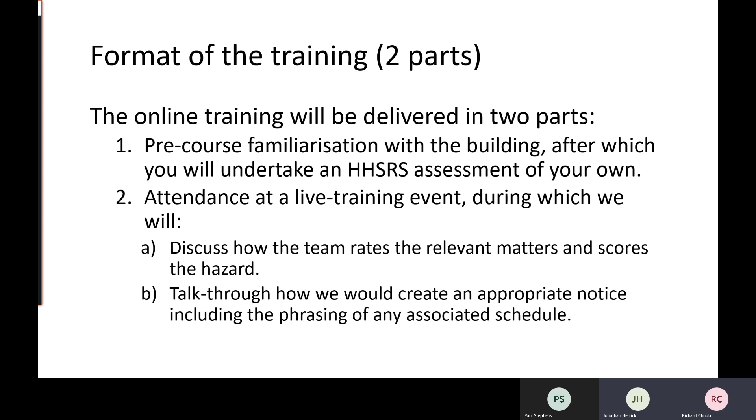The format of the training today: we have an online training course delivered in two parts. The first part is a pre-course familiarisation with the building, after which you will undertake an HHSRS assessment of your own. The second part will be a live online training event during which we will discuss how the team has rated the relevant matters and scored the HHSRS hazard, and talk through how we will create an appropriate notice, including the phrasing of any associated schedule.

The aims of part one, the pre-course familiarisation: this presentation covers an inspection of a hypothetical high-rise residential building. Our commentary aims to explain what we observe and any impact on building safety. You should take note of the presentation and undertake your own HHSRS scoring ahead of the training day.

Remember to score the relevant matters, which are scored 0 to 3, with 0 being not of concern and 3 being of extreme concern. You'll then need to assess the likelihood and also the harm outcomes. It should take between 2 and 4 hours for you to watch this presentation, read the associated documents and make your HHSRS assessment. Whether you work in groups or alone, you'll get more out of the part 2 training if you have engaged fully in part 1.

You will note that we have provided a fire risk assessment and a fire strategy with the join-in documents to go with this video. Some of the information in the strategy is not consistent with what is on the diagrams. This is on purpose and is what you will see in real life, so don't worry if it doesn't exactly match up.

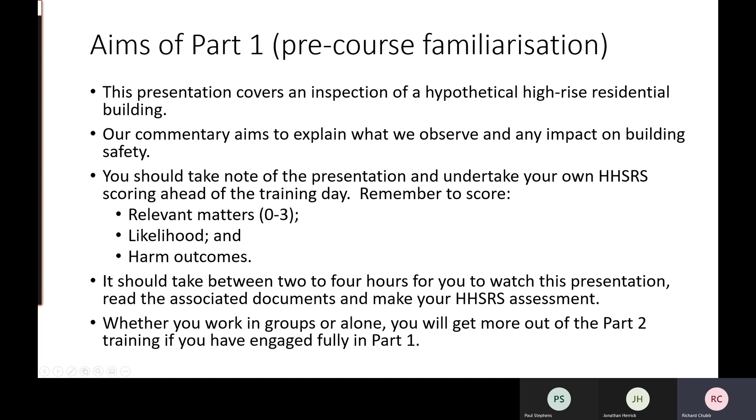Moving on. Part one, the building inspection: what we know before the inspection. Presume that we have served a section 235 notice requiring the production of a lot of different documents.

This first part of the presentation will cover what we have received prior to going on the inspection. Okay, over to John.

We've learned that the building was completed in 2012, and contains 64 flats or studio apartments. The principal construction was steel frame with concrete floors between levels. There's also a concrete stair core shown on this schematic on the left-hand side of the diagram. Floors 1 through to 8 have an identical floor plan layout, shown as a box covering a number of floors marked leaseholder flats. There's a 15-metre travel distance from the furthest flat entrance door to the staircase lobby.

There is a smoke extraction system, shown as the smoke shaft on this diagram, and an AOV, an automatic opening vent, at the head of the staircase. The diagram also shows basement car parking, with the ground floor accommodation occupied by 2 commercial premises and an unstaffed reception area. The front door, the main access into the building, is secured with a key fob access, designed to secure against any unauthorized access. The height from the ground floor to the highest occupied floor is 26 metres, and there is a separate exit from the basement car park to the outside.

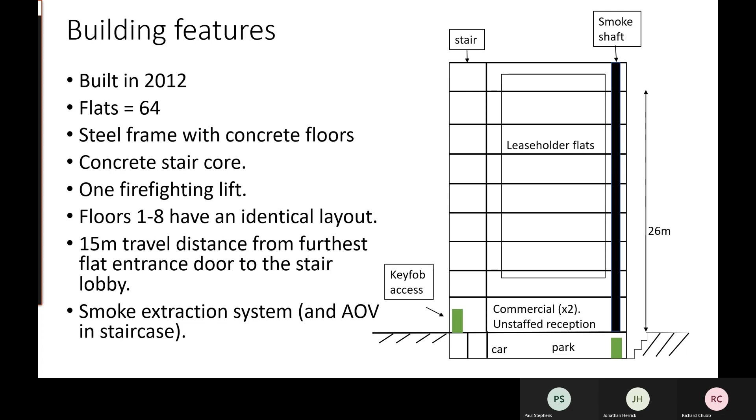Now, this is a typical floor plan layout for floors 1 to 7. The previous slide said that floors 1 to 8 are identical. While that's true, the cladding on the building differs at different floor levels. So on floor 8, you will see that the wall system is different. Let's start with the wall system.

On floors 1 to 7, the predominant wall system is between terracotta, shown as the green lines, which are the end caps to the building, and ACM, which is between the balconies here, coloured grey. The black lines on the building here are balconies that serve each of the flats for outdoor space.

Now, moving on to the floor plan itself, to the left-hand side you can see the staircase enclosure. You can see that the door from the staircase opens towards the staircase, so that's in the direction of travel. If you were escaping a fire in a flat and heading into the staircase, those doors open in the direction of your travel.

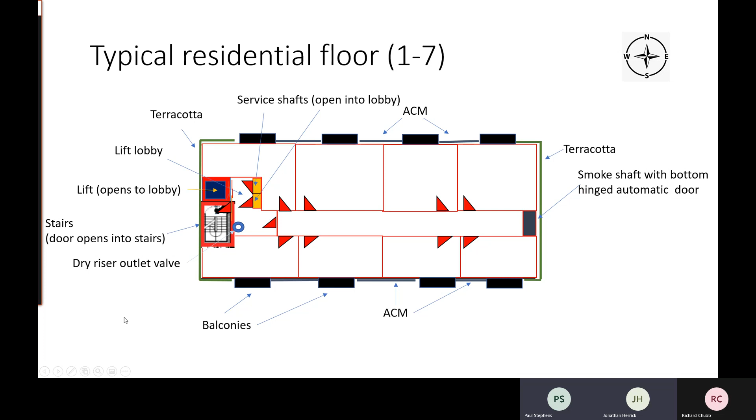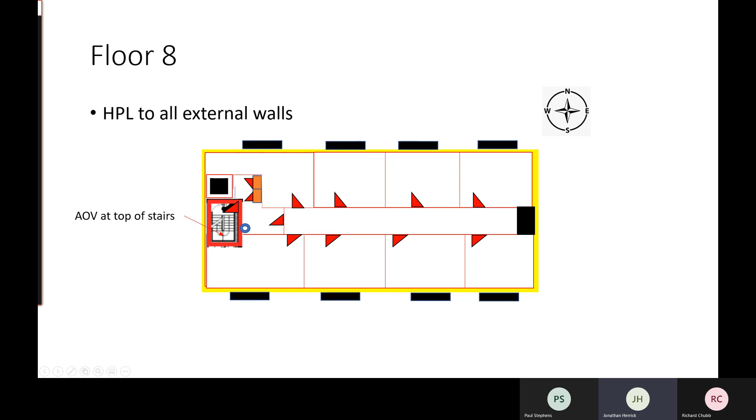So now we look at floor 8, you will see that the actual floor plan layout is just the same as the floors below, but our cladding system has changed on this one. We'd say this is the crown of the building, and it's this yellow colour, which denotes an HPL wall covering, a high pressure laminate wall covering cladding system to the outside of the building on this floor.

So that's dealt with the residential floors on floors 1 through to 8. As we descend now to the ground floor plan, you will see that the ground floor has that fob access control to the front door, and immediately in front is a reception desk with post boxes and a small office for the occasional staff that work in the building.

You can see that it's necessary to walk past the entrance to the staircase in order to get to the lifts that service the building, and that there's no communication at all from that residential access point to the commercial buildings, commercial 1 and commercial 2, as shown on this plan.

The bin store is accessed from the outside through a separate door and does not communicate at all with the inside space. You'll also see a ramp marked there, which is the vehicle ramp, leading down to the basement car parking areas.

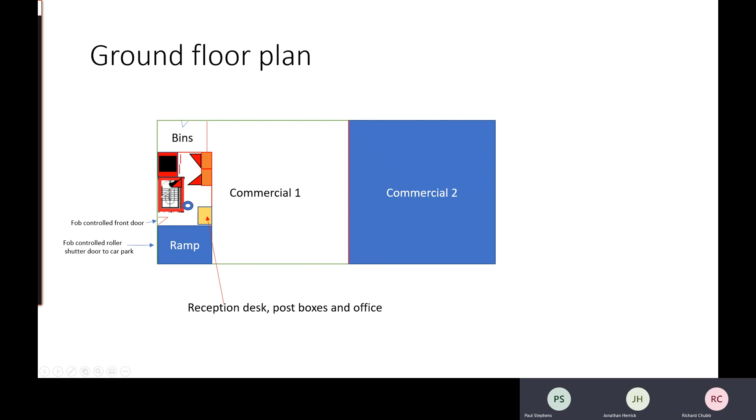So down onto the basement areas, we can see here that as we come out of the staircase enclosure, there is the lift adjacent to it, and there's a door that goes straight through to the car parking and cycle store, which takes up most of the basement area. But there is a small room accessed from the car park, which is the plant room for the building.

At the far end of the basement car park, there's an alternative exit route and another small staircase, which goes to the ground floor and to fresh air.

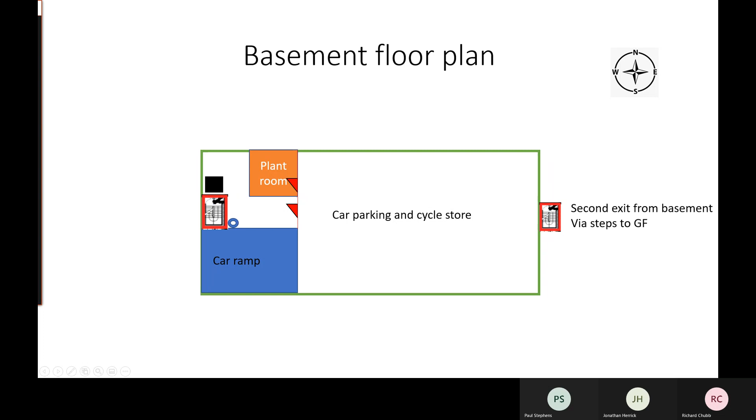Okay, so then we look at what's inside the flats regarding the services to the block and to the flats themselves. We have hot water and heating provided by a gas boiler that serves the radiators to each flat, and the gas pipes actually come through the service riser in the firefighting lobby.

We have gas service risers coming up through that area that then go through the ceiling voids to serve each gas boiler to each flat. There's a gas boiler to the common areas contained in the plant room of the car park. Drinking water is provided via pumps from the central water tank in the basement plant room.

There's electric meters for each flat, contained in cupboards to the protected corridor. There's also a secondary electric supply for use for the lift should power fail, and for the smoke extraction system. This secondary supply can come through via a different transformer, service wire, or it could also be provided via a secondary backup generator in case there's a fire and total power failure to the building, where you need systems to work for life safety.

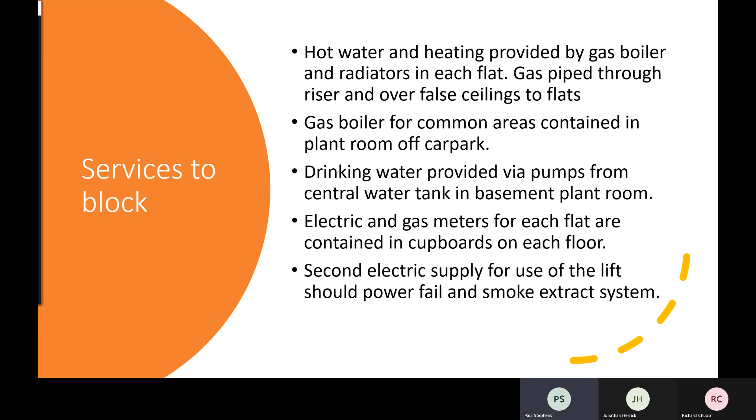Okay, so provided with the joining instructions to the presentation, you should have been provided with a fire strategy document, which was produced at the planning stage and may not be as built. You'll also have been provided with a fire risk assessment, or at least a summary of it, as quite often they're about 60-70 pages long.

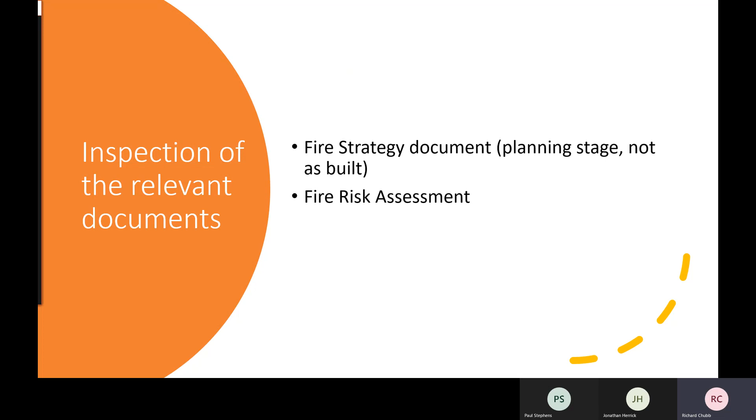Okay, so as you know from the floor plans, you can see what type of cladding is on the building, and we do have phenolic foam insulation. So in this case, we need to look at percentages. We have ACM, which is 20%, and it's category 2. That means the ACM does contain some fire retardant to that product. However, we'll talk about a bit later on how that works with the insulation behind.

We have 20% HPL, which is Class D, Euro Class D. We'll talk about the classification system in a little bit further. There's no valid BR135 report for the wall system. We have 40% terracotta rain screen with a BR135 pass for the wall system.

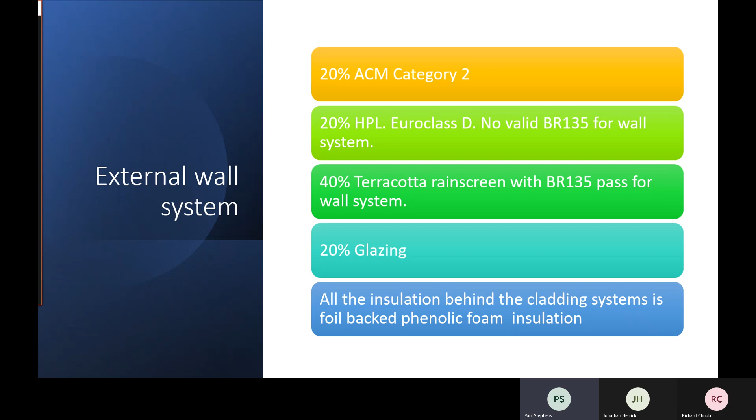We have 20% glazing. And when we talk about BR135, that is an assessment of the British Standard 8414 test undertaken by a competent engineer to look at the parameters set for the test and to establish if the BR135 classification is a pass, not just for the cladding system, but also looking at the fixings as well. So we do have phenolic insulation behind the ACM, and that does have an effect on the category of that system. It makes it worse, which we'll talk about in the next couple of slides.

So we'll talk about categories. We have category 1, category 2, and category 3. As you go down the scale, category 3 is the worst type of ACM. It has no flame retardant properties to that material, and that's why the values in megajoules per kilogram increase per category, where category 1, the material of limited combustibility, is very low. And again, this is a product only.

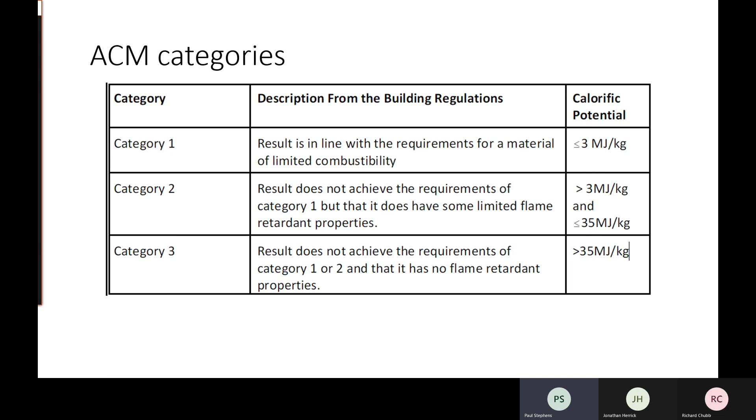If you look at the insulation behind it, the system itself does become worse. We'll look at that in the next couple of slides, regarding if it was some sort of stone wool insulation instead of a phenolic foam rigid foam insulation type.

So this is the classification system. A1 is the best type of system. In this case, on the top crown of the building, we do have HPL, which is classification D, as you can see where that belongs on the table. The scale goes from A1 to F for product classification, and you can see the definition where it's considered non-combustible or limited combustibility, and how it contributes to the fire. So the HPL is class D, S2, D0.

So we look at the classes, what that represents. The classes of reaction to a fire performance, A2, B, C, D, and E, are accompanied by additional classification related to the production of smoke. So that's where the S comes from, on a scale of S1, S2, S3.

As you go further down the scale, the worse it becomes, with S1 indicating the lowest production of smoke. There's also flaming droplets, particles, which is the D classification, where D0, D1, D2, with D0 indicating the lowest production. Note, when a classification includes S3, D2, this means there is no limit set for the smoke production or for the flame droplets or particles.

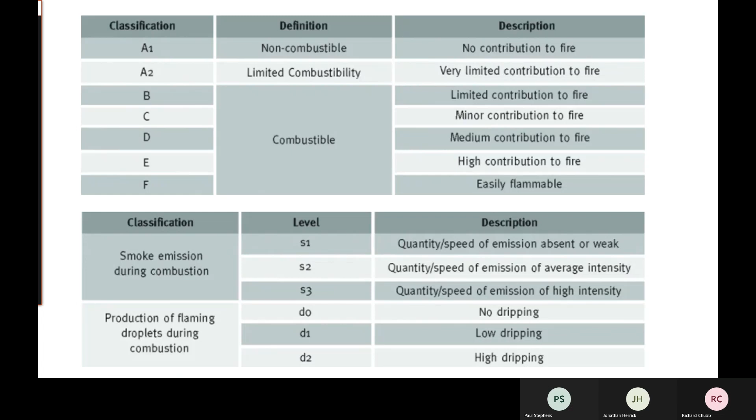This slide shows us the government's consolidated advice note and is a table that represents the testing that MHCLG has had done and how various types of ACM with associated insulation have fared in those tests.

Down the left-hand side, you can see the type of ACM ranging from category 3 with an unmodified polyethylene filler. This is ACM material with a filler of unmodified polyethylene. Category 2 is an ACM material with a fire retardant polyethylene filler - so this is like a sandwich with aluminium on two sides with that filler in between. The best case is a limited combustibility filler between those two sheets of aluminium, and that's a category 1.

Across the top, you can see the various types of foam insulation used in association with these tests. They include PIR foam, phenolic foam, and stone wool, where stone wool would be the best case in most cases. You can see from this test that the category 3 ACM fails with PIR foam and fails even with stone wool. This is the most reactive ACM material that you might find on a building.

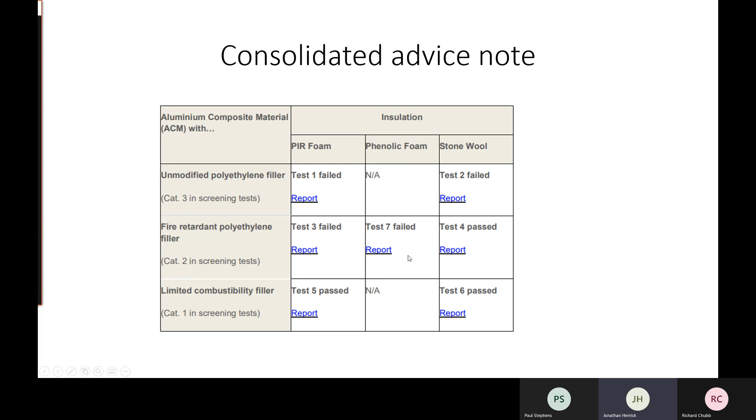Okay, so as part of your section 235 notice, you've received a highlight report of what is present in the cladding system. This has been provided by an external contractor employed by the freeholder to give an opinion on what is present behind the rain screen and what the actual rain screen comprises.

So it's a ventilated rain screen cladding system, as opposed to one that's just been bonded straight onto the external makeup of the building. The ACM is category 2, as we've stated previously, and you've been provided with reassurance via a BRE test certificate, which has confirmed that it's a flat riveted panel and has all the category 2 characteristics. The HPL, of which there's 20% on the building, is Euroclass D S2 D0.

So that means that it's combustible and produces a fair amount of smoke, but no droplets. The glazing tends to be non-combustible. 20% of the building is covered in that.

There's insulation, which is a foil-backed phenolic foam. This has a Euroclass C S1 D0, so there's no dripping associated with it, but there is a limited amount of smoke which comes from it, so it is combustible. It's also not been taped at the seams of the insulation and is falling away into the cavity due to a number of missing or inadequate insulation fixings.

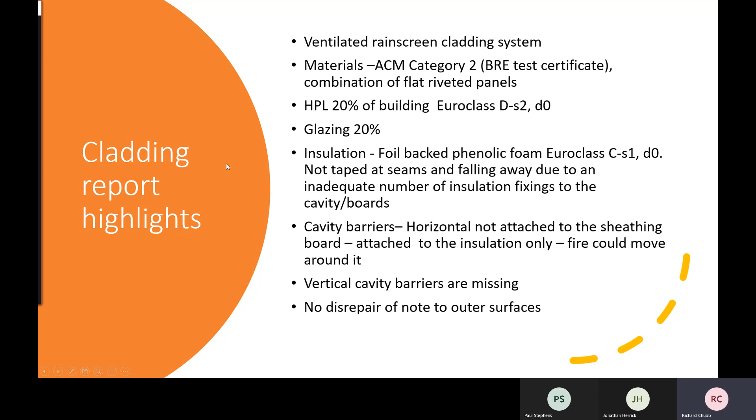And then we've also got to think about the clear cavity. Sometimes in certain cladding systems, you do need a clear cavity set up by the manufacturers of that cladding system, but there are ways of dealing with it.

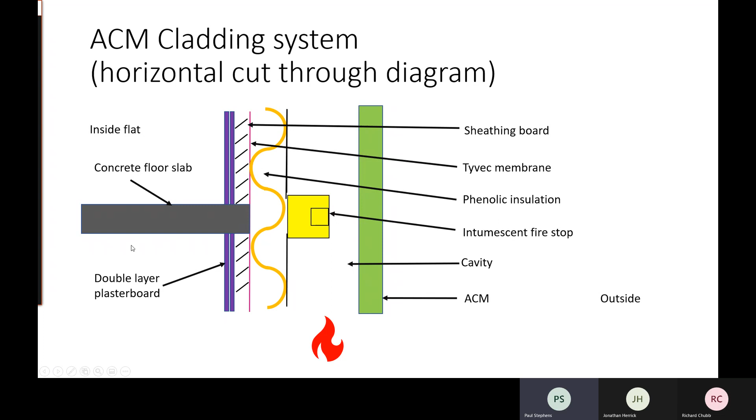Okay, so that is a brief summary of the information that we've received prior to an inspection. And now we are going to go through the on-site building inspection, which we will start, as we always do, with an external inspection of the building. So, over to Paul.

So when we first do an inspection, you need to get a feel for the building. In this case, we do have dimensions provided to us. From the previous slides, you're aware of the height of the building, you're aware of the internal corridor dimensions. The external dimensions are 30 meters by 20 meters. You've got balconies in series.

So there was a balcony fire. Potentially that could cause a chimney effect as well, catching the next balcony alight. If there's not adequate fire stopping around windows and doors, and if there was an internal flat fire, they can also then reach up to the balcony above.

So it is a building above 18 meters, so you are following certain regulations set out by building control. It's slightly different if you do have a building below 18 meters. And as you can see from the color coordinated diagram, you have HPL, which I spoke about, at the crown on the top story.

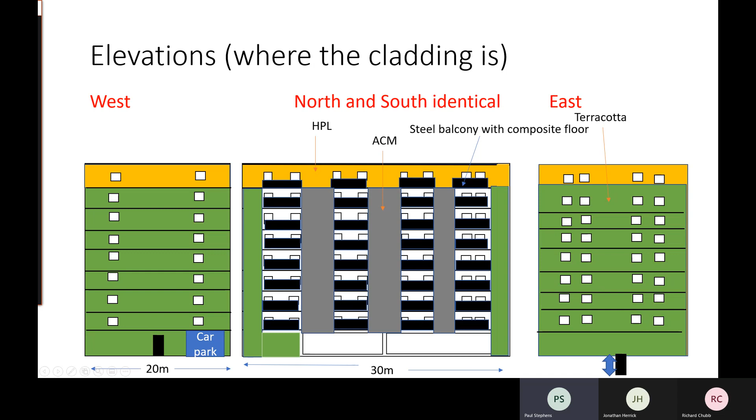So when we talk about the ACM, we are aware of what materials are on the building, so then we need to look a bit more closely at what materials are presented to us. Normally we see the ACM laid out as a rivet flat panel system or a cassette system. The cassette system, through other research, has technically been deemed to be slightly worse than the rivet panel system.

Sometimes the ACM is actually hard to identify. This is why you need to look at any external edges you can see. The ACM is fitted to a steel frame system that gets fixed to the structure, and that provides basically the grid system so the panels are easily attached. The harder central core of the ACM is attacked by the fire, the aluminium starts to delaminate, and that spreads the fire further.

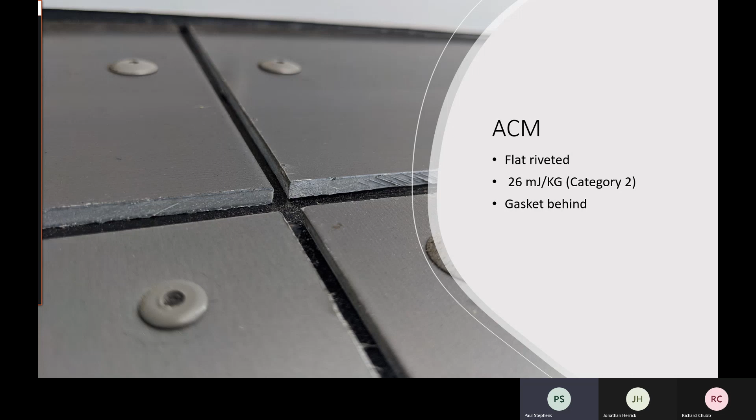What we normally expect is a non-combustible ducting, or you could have an intumescent grill. Otherwise, you could be looking at other fire stopping products on the market to prevent any fire escaping that flat and reaching the cavity system.

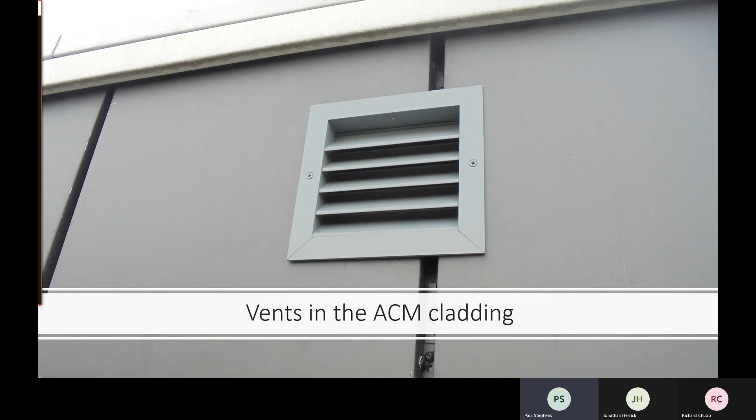So not just the vents, you'd be looking at other items as well, such as trickle vents to windows and doors that could also have an effect.

Among our other observations from our external view of the building, we consider firefighter access. Typically for a building of this size and height, we would expect access to 50% of the building as a minimum, but in this case we had 100% access to the perimeter of the building, which is very good.

The dry rising main inlet valve, where the fire service will attach their hose to charge the dry rising main pipe, was covered by foliage that had overgrown around it. So it was very difficult to see the location of the inlet, and we had to look very closely to find it.

The fire hydrants were in the street, and in this particular case were approximately 100 meters away from the dry rising main. As part of building regulations, that distance should be no greater than 90 meters, so we were just over what should be in place. This means it would take longer for the fire service to lay their hoses out from the hydrant to the point at which they can charge the dry rising main.

There were no buildings close to this one that would cause us concern, for example with fire spread from one building to another or from this building to another, so that was not a consideration in this particular case. The building was also protected with closed circuit television, which was there for security purposes.

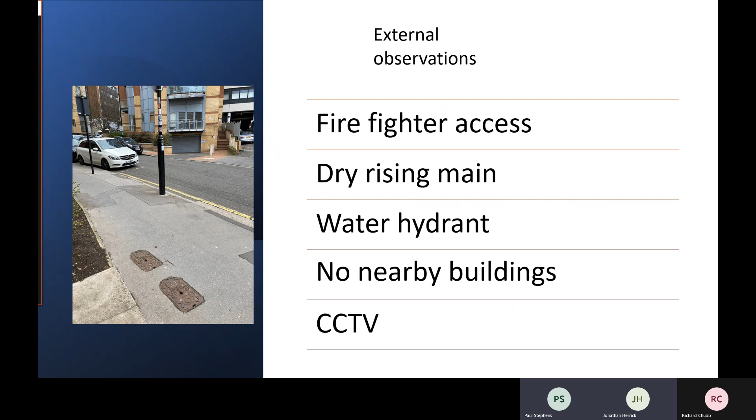Our final exit route moving around the building took us to a gate that was adjacent to the car park ramp. It was secured against unauthorized entry, held in particular by an electric operated magnetic holding device, and was a self-closing gate so that it could not be left in the open position.

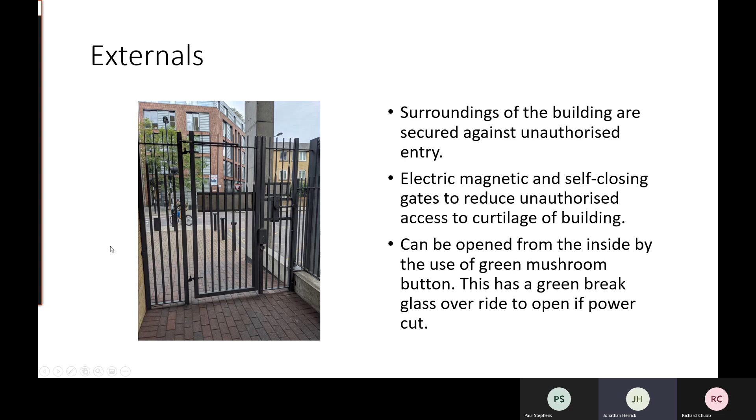It could be opened from the inside by using a green mushroom button. Strike the button, it disengages the magnet and the gate can be opened. But in case of power failure or emergency, there was also a green break glass cover override, located on the wall to the left of this picture, just out of shot of the photograph.

Okay, so we've covered the outside of the building now. Our inspection will move to the inside of the building, and what we do on site is walk up the protected escape route to the top of the building, where we then restart our inspection.

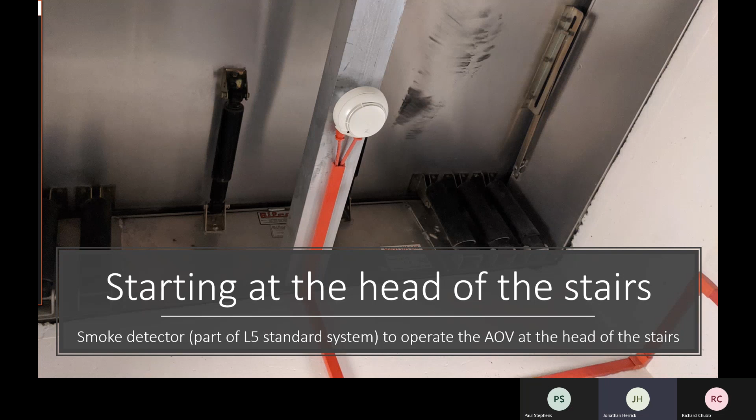That detector is part of an L5 fire alarm system. An L5 just indicates that smoke detection is provided to certain positions or locations of the building only. In a residential building, we don't expect to find fire alarm sounders throughout the building, as that would be unusual in terms of the fire alarm standard. In a residential setting, these detectors are used simply to operate the active fire precautions in the building, such as this automatic opening vent that we can see here.

Separate from the automatic opening vent, the building is provided with a smoke extraction system via that shaft that we saw on the earlier plans. On the roof, that shaft leads up to this extraction equipment, which includes scrubbers and various things for the smoke.

That will mean the smoke is not removed with the same velocity as it would be designed for, because it's designed to be taken out through this machinery and extracted and dissipated into atmosphere from the building. So that is not going to work as it should.

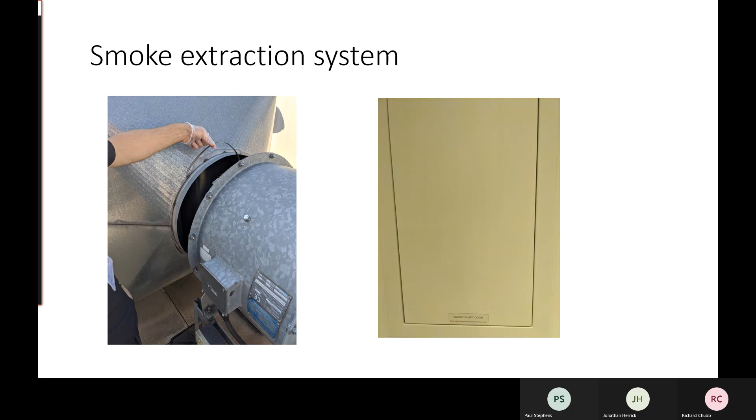As we stated before, we've got a firefighting stairs and a firefighting lift. What the regulations require us to have would be a 120-minute non-combustible shell, basically. In this case, it's a concrete shaft. Even though it's a steel frame structure with concrete floors, normally the firefighting stairs is one of the first elements to get built. We expect certain bits to be in this staircase, such as emergency lighting, an AOV at the head of the stairs, and fire exit signage.

We also need to look at what type of doors are on each landing level. In this case, we have firefighting stairs and technically a firefighting lobby. However, if we look a bit more closely, we have service risers containing gas in that firefighting lobby. Normally you expect an FD60 door at each landing level. If there wasn't any gas in that service riser and you have a lobby, you could argue FD30 fire doors would be sufficient, but we have an ignition source now in the firefighting lobby.

So when we talk about gas, you also need to look at other regulations, such as gas use and installation regulations. That will determine how service risers should be vented, which Richard will talk about a bit later on.

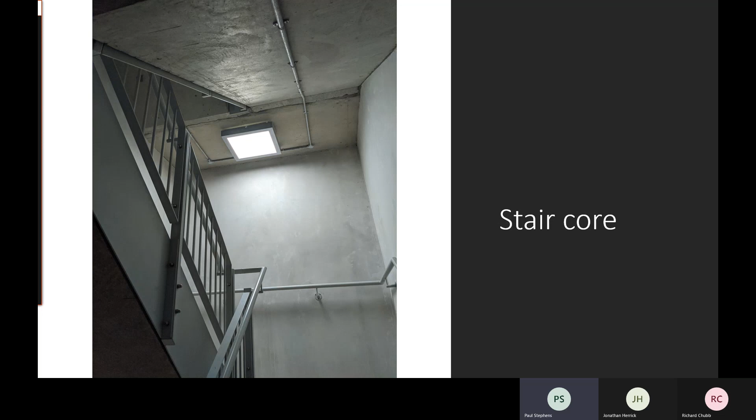So we do have an adequate firefighting stairs. The stairs has to have a certain width, due to fire personnel potentially getting access to the fire, and also potentially two-way access of any other residents escaping. So the overall width will be a minimum of 1.2 meters.

Especially since it's on casters, it's likely to move around that lobby area and could cause a real problem for people escaping the building. It's interesting in itself that the Waking Watch would make themselves comfortable in what is a means of escape route and potentially a place of relative safety, when the fires are likely to happen in flats, and our risk in this building is that the fire could escape from a flat and get into the external envelope of the building and burn all around the outside.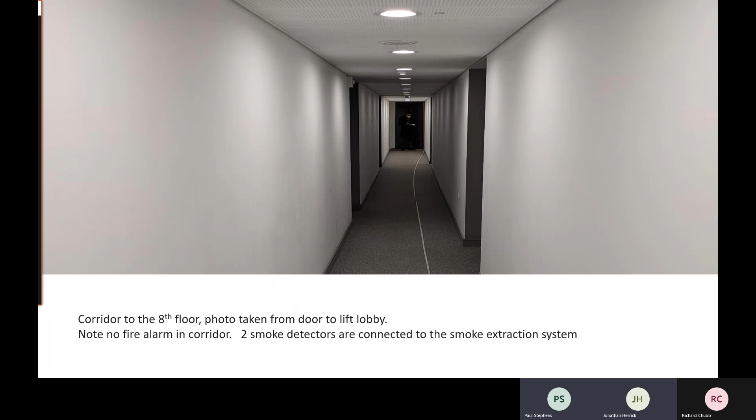Now, as we're moving around the building, we get to see all of the fire doors, and we've got a number of inputs here on the door. In the left-hand picture, we can see that a door here has at one point had a locking device fitted in it. As it turns out, the lock had been removed, but the mechanism was still present. You can see it was a deadlock of some form, and that it creates a hole that passes all the way through the door. So there's no way we could classify that as a fire resisting door, insofar as smoke and fire would find that hole as a weak point and would pass straight through the door with no real difficulty.

On the right hand picture, we can see a vision panel provided to the doors, which is very useful. You can see if somebody is on the other side of it, or more importantly, if fire and smoke is on the other side of the door. So it helps you to make decisions in terms of your evacuation. The glass in the door is Georgian wired glass, and it's normally held in place by a particular beading system, which is appropriate for holding vision panels into fire doors.

In this case, what we have is a kind of semi-sticky mastic that we were able to touch, and it stuck to our gloves. In any case, it wasn't complete around the glass. You can see that it doesn't meet up, and there's a gap here, and that would be a gap that fire and smoke would attack, and it would in itself weaken the door, and it would not last the designed period of fire resistance there.

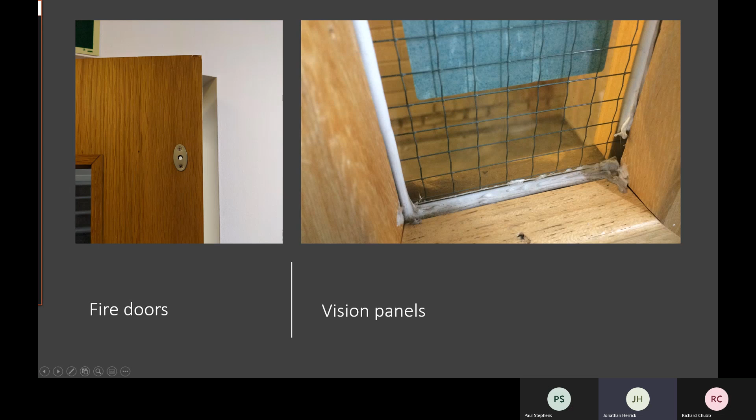As we go around the building, we open up as many service shaft doors as we can to get a good idea of what is inside them. So what we have here is the main service riser shaft, and it's open, so it's not sealed at the floor and ceiling, which is what you quite often find in most buildings these days. So what this allows the building to do is pass the hot water pipes and the gas pipes up and down the building.

If you've got a gas pipe, it does need to have some form of ventilation throughout the building. We looked upwards here, and there was no ventilation at all. So that's obviously something that we need to consider as being a bit of a problem in this building, because gas is lighter than air. It should be able to rise up through these shafts and go out of the ventilation at the top of the building. This wasn't possible here, so this could allow the buildup of gas within the building, which could be an explosive atmosphere. So that's something to consider under the fire risk, but it may also be assessable under the hazard of explosions. So it may be worth considering under that also.

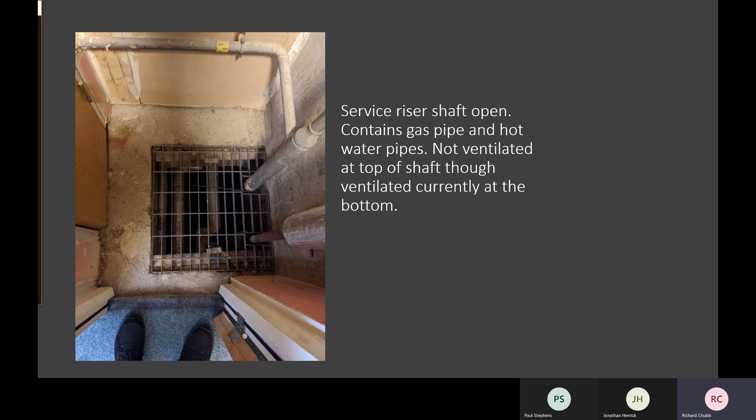Moving on, also within the same cupboard, we saw some in the cupboard next door. What we have here is electricity cables, the black ones, some comms cables, which are the white ones, and some fire alarm cables. They had passed through what appeared to have been fire stopped originally, what we can see here is some fire stopping. And obviously it appears that some alarm engineers have cut through this to pass the additional alarm system cables through, and they haven't resealed it afterwards.

This was present in one of the cupboards, and if you find one problem, you normally see it in all of the cupboards. However, in this building, it was particular just to one of the cupboards. So we noted where it went, and it was passing between the lift lobby and the service shaft. So any fire in the service shaft would compromise just the one lift lobby on the top floor. So that's something that we need to make note of for our HHSRS inspection.

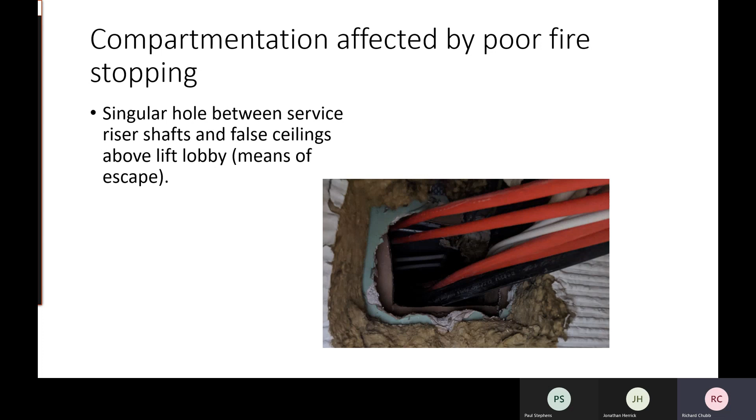I said that we would look at doors again, and here you can see where we've taken pictures of the top edge of the door leaf when we've opened it. On the left-hand side, you can see that there's a BM Trada door scheme fire plug. And that tells us that that door is a 60-minute fire door. So what we've got there is a blue plug with a red tree in the center of it. The blue plug represents that it's a 60-minute door, and the red tree says to us that the intumescent material with which the door should be provided has not been fitted in the factory. So the intumescent strips, smoke stop seals, have been fitted as a retrospective upgrade.

In the right-hand picture, we've got a certificated fire door. It's marked with that label on the top edge of the door, and that tells us that it's a fire door and that it lasts for 30 minutes. Now, that door in particular was on the lift lobby, and as a part of the fire protection to the staircase, which should have been provided with 120 minutes of fire protection. And they are not going to get 120 minutes of fire protection with a 30-minute door. So this was being used in combination with a 60-minute door. So that would get them up to 90, but not up to the full 120, which they should have had.

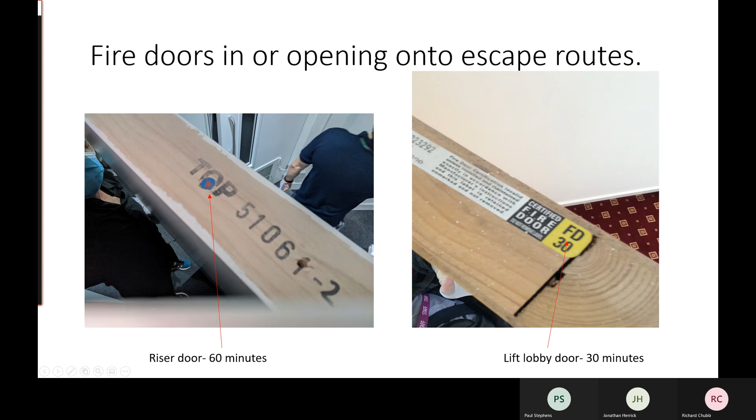This slide is showing the smoke shaft door opening on its automatic actuator. As it's opening, while we were there, we could hear the fans ramping up, but the draw in the staircase was nowhere near as strong as we expected or experienced elsewhere. We're confident that the lack of suction is a result of that grommet missing on the roof, so we're not getting the volumetric movement of air through the corridor that we would expect. That system is really not working as it should.

This was operated for us by the building management, but ordinarily would be activated by smoke detectors.

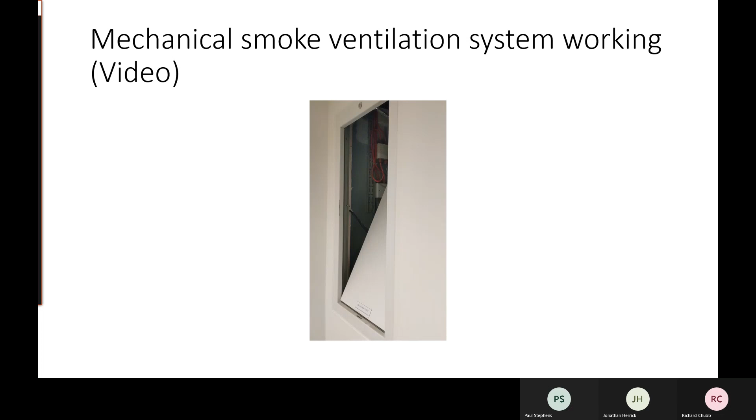So we're going into the internal of the flats now. We've done the communal inspections and looked outside, and hopefully you'll get access to a percentage of the flats in the building. What we look out for as we enter a flat, we've worked out there should be an FD30S fire door entering the flats.

The S stands for smoke seal. As you can see from our inspection, there's a missing cold smoke stop seal along the perimeter of the door, or they could be attached to the door frame. What we also expect from a flat entrance door is a self-closure, which is also missing here. The reason a front entrance door needs a self-closure is because as you exit the flat during an evacuation, the door should close to contain the fire as much as possible until personnel come to extinguish it.

As you do inspections, you'll see a number of issues with front entrance doors - they're never perfect. In this case, on the outside of the door in the communal corridor area, there's been paper added to the door. For a fire door to be given the classification of FD30 or FD30S, it needs to go through a test.

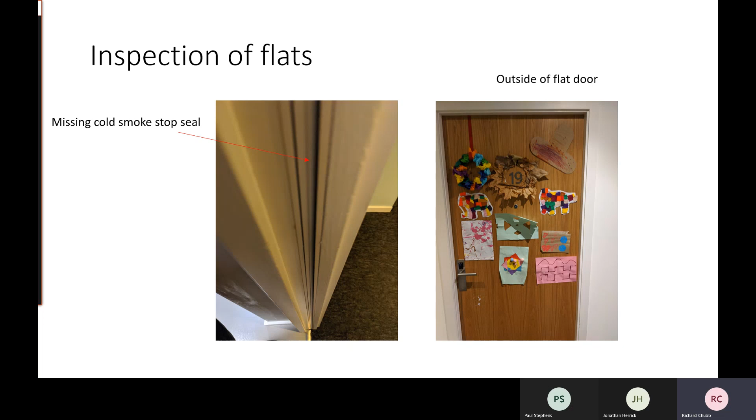Richard, would this be a management issue? Yeah, so this is something you may address with the manager of the building, or the owner of the flat if they were around and willing to talk to you. But it's not necessarily something you would take into account in your HHSRS assessment, because they're not permanent adornments to the building - they're temporary attachments. So it's not something you'd necessarily factor into your HHSRS assessment.

So as you're inside the flats, you'll be looking around at certain elements, such as the smoke detection. There are two types we commonly see: LD3 systems, where smoke detection and a sounder are incorporated in the internal corridor, or an LD2 system, where smoke detectors are provided to other rooms such as bedrooms and lounge, with a heat detector in the kitchen.

You also get other penetrations to the flat. In the event of an internal fire, sources like room vents matter - a lot of flats have recyclable air change ventilation systems, with an outside vent to push air out and an internal vent to draw air in. These go through the cladding system, and these penetrations need to be examined very carefully. It's very rare now to find a flat that doesn't have this type of system.

On the internal doors and front doors, there's a cold smoke seal to the front door - it seemed to be a draft excluder. You need to check what type of smoke seals are on the front door, and whether anything's been added, such as draft excluders. In this case, we were very suspicious of the smoke seal around this door - it was deemed to be more of a draft excluder of some sort.

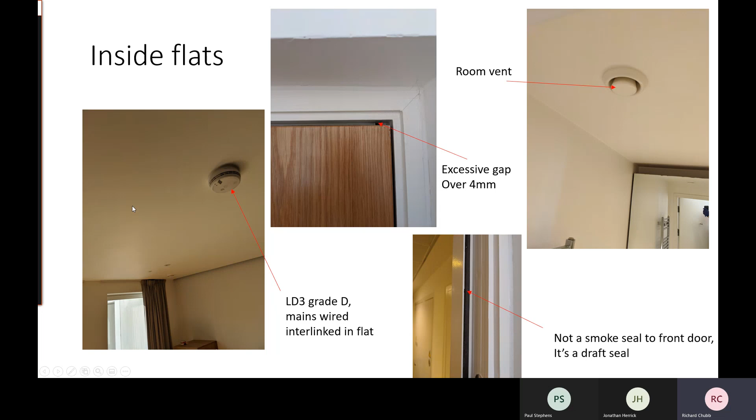We've also got, as we look on the inside of the door, an excessive gap over 4 millimeters between the leaf of the door and the edge of the frame. We've noticed this on the flat that we've inspected here, so this might need more investigation, looking at whether this is a common problem across a number of different flats. You might want to have a look at a few more flats if you notice there to be a problem with the fire doors such as this.

As you get access into the flat, you're also then able to access the balcony. This is where potentially you could get more in-depth feel and look at the cladding system. You could look around the edges, underneath sills, use a borescope to get a bit more in-depth knowledge of exactly what you're dealing with. All the flats have a balcony adjacent to the ACM on floors 1 to 7 and HPL wall system on the 8th floor.

On this balcony we do have a composite decking, that's Euro Class D. As we've gone through the Euro Class classification earlier on, you'll be able to see where Class D fits in. It's a composite floorboard, a resin board with some timber fibres glued together, which makes it a Euro Class D. You could get normal decking board, which would be slightly worse, but you could also get some fire performance added to bring that Euro Class up a little bit further.

When you're doing the balcony inspections, you also need to look at what ignition sources are there. There could be a barbecue, there could be other storage left on that balcony. If that's right adjacent to the cladding system, there's a potential ignition source for that cladding system to catch light.

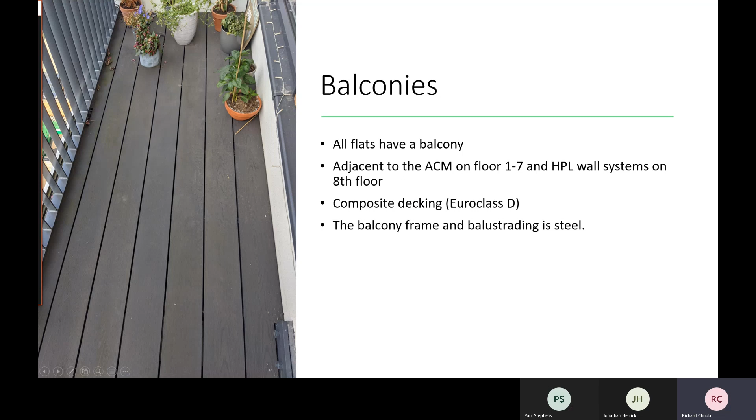As you're doing your external evaluation on the balconies, you may also see other penetrations or ignition sources. In this case, you can see there's a light added to the cladding system, so you've got wiring, and you could potentially get an electrical wire fire. You also have a waterproof plug socket, which generally has an IP rating, but you can plug anything into that on the balcony - could be lights, and if lights are surrounding the balustrade, any glass balustrade, or the door frame, that's also an ignition source. You also have holes behind these elements going through the cladding system. It's not ideal.

As you're looking at the external cladding system, you can get a bit closer to it. In this case, if you access a balcony at the crown of the building, that's the top half where the HPL has been installed, you can visibly touch, feel and measure the cladding - in this case the HPL, normally around 12mm thick at the edges. It's slightly different from ACM, with a different texture and thickness, and if you see an external edge, the appearance should be different as well.

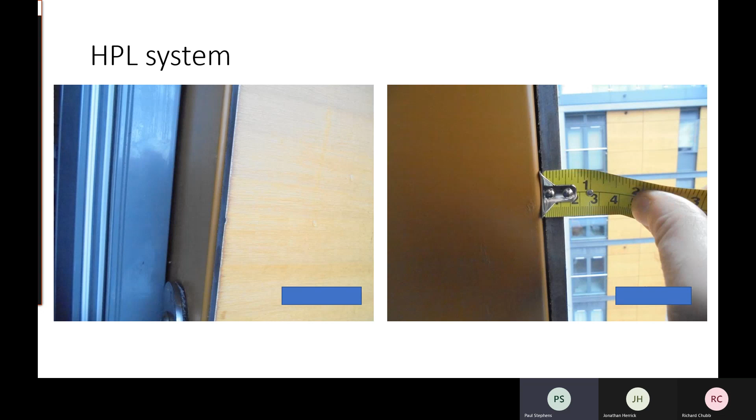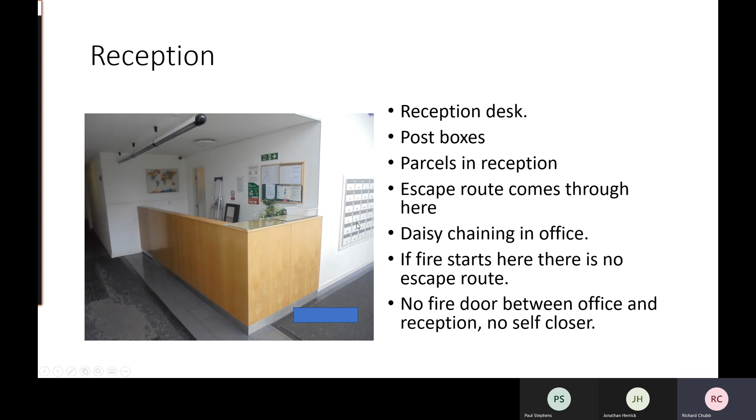You'll also note that there's a door here that's not self-closing, and it's also not a fire door. So any fire in there is likely to come out pretty quickly, which, considering we've only got one escape route from the residential areas, would be quite a serious problem and will compromise the entire escape route. That's something likely to be very important in your relevant matters.

Now, in themselves, no particular problem, but an exit door should only have one means for opening it. It should not be fitted with two escape mechanisms. It means I've got to go through two separate actions in order to open the door, and I should only have to go through one single action to get out of a fire escape door.

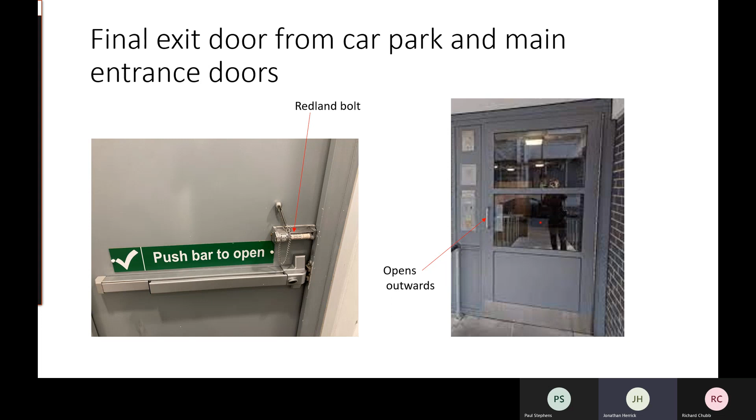Now, what's going to happen if there's a severe fire in the car park is that these plastic pipes are going to soften and melt. As they do that, they will create a hole through that concrete floor and therefore a mechanism for fire and smoke to pass through the floor and into the ground floor areas. So this is not a good solution. The foam is not going to do anything other than fill the gap around the pipe and the concrete floor there.

So what they should have is an intumescent collar around them, which can be fitted into the concrete floor itself, so that as it expands it pushes against the concrete floor, and then as the pipe melts and softens, that expansion pushes into the pipe, crushes the pipe, and forms a complete seal.

Other types are external to that, and they're fitted in a steel cage. The steel cage is attached to the concrete floor, and that contains the intumescent material. Again, as the pipe softens and melts, the intumescent expands, in this case against the steel cage, and fills the gap. But neither of those two products were here. We had this awful expanding pink foam instead. And that wasn't the only place we saw expanding pink foam.

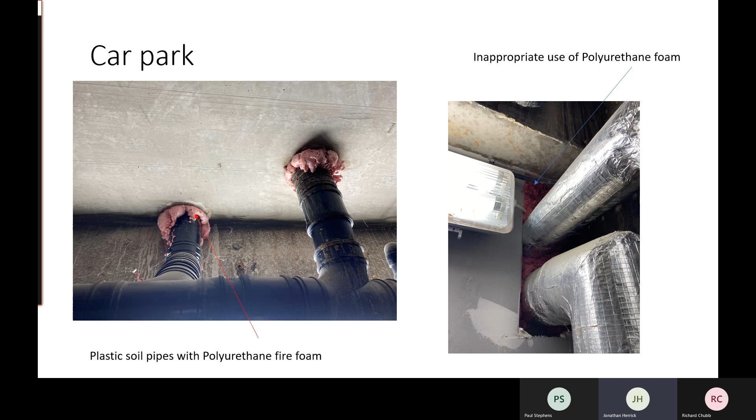So, good place to be. You've looked at the external of the building, the internal service risers, firefighting stairs, communal corridors, gone into flats, and worked your way down to the car park and basement for the final part of your inspection. In the basement you normally get a plant room or a number of plant rooms, containing other services, pumps, etc.

The floor to the basement you'd expect to be at 90 minutes fire resistance. So you need to look at what fire resistance the structure should be built to, according to the building regulations. In this case it's 90 minutes to the basement floor, and it's not sealed.

So if there was a fire in the plant room, it could spread up through the central part of the tower to each flat. Added to that, the construction of that shaft itself should be questioned, because it should have 60 minutes fire resistance around the sides as well, so that if a fire did break out it won't penetrate into each flat. That floor should also be sealed for 90 minutes. If it was a fire rated flue going up there, you wouldn't be too worried, but you also need to check what type of flue that is. As you can see in this riser, there are a number of services going up, and it's not fire stopped or has any protection at the plant room level.

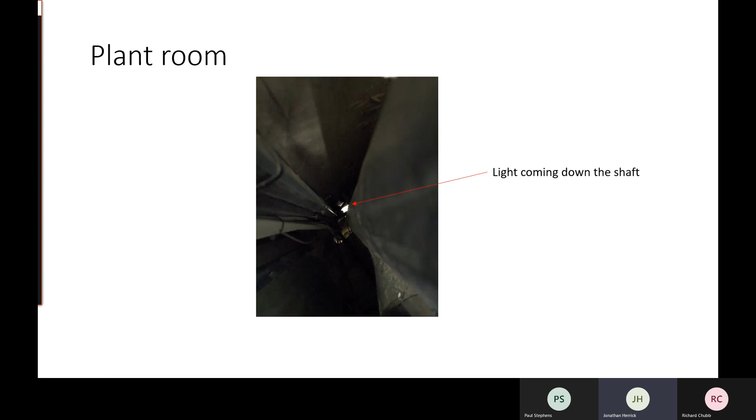Yeah, if you remember Paul, it wasn't daylight shining down from there - I popped up to the second floor and shone a torch down it, and you were able to see that light coming down from even just the second floor. So it was passing through from the basement to the ground to the first floor at least. We still had a big problem there of potential for fire to go from the plant room and spread its way across the floor plates of the building above.

However, in terms of your HHSRS assessment, this is a behavioural issue rather than a feature of the building itself. What you're really looking for in terms of the bin store is whether there's actually adequate bin space for the number of people in the building. What might be indicative that there isn't is if you've got a number of overflowing bins, for example.

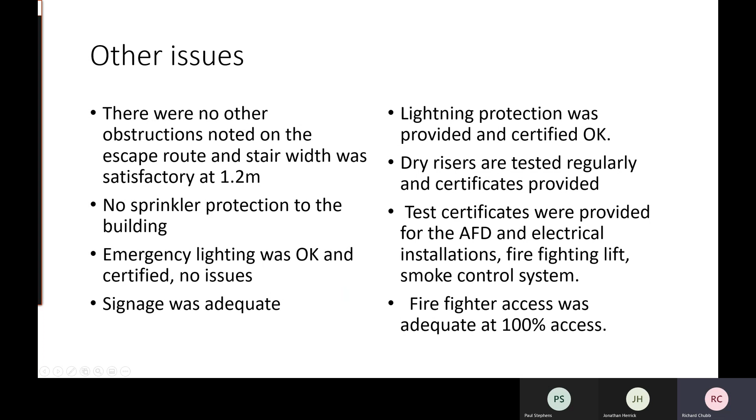Okay, so that brings an end to the day's inspection. We tend to get together as a team and discuss what we've found.